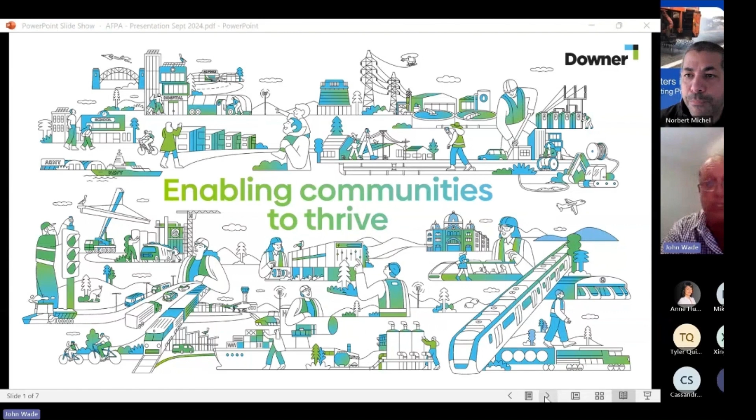Representing Downer today on this presentation, one of the key things for Downer is sustainability. It's one of the key pillars for Downer's purpose, and part of that is delivering low carbon, sustainable pavement solutions to roads, airfields, and mining and the private sector.

Just some high level numbers to run through as we get through the rest of it. At the moment in Australia, Downer's spraying over 35 million litres per annum without any cutter. So it's pretty widespread already, and there's lots of other solutions we'll cover off today about adding to that along the way.

Part of what we're going to talk about is crumb rubber in the first part of the discussion, and that's probably around the production of crumb rubber and essentially a lot of the new field blending techniques that have evolved over the last 4 or 5 years, in support with TSA and other partners.

Tyre recycling, end of life tyres, is a big part of ensuring sustainability. At the moment we're doing nearly 375,000 tyre end of life equivalent passenger unit tyres.

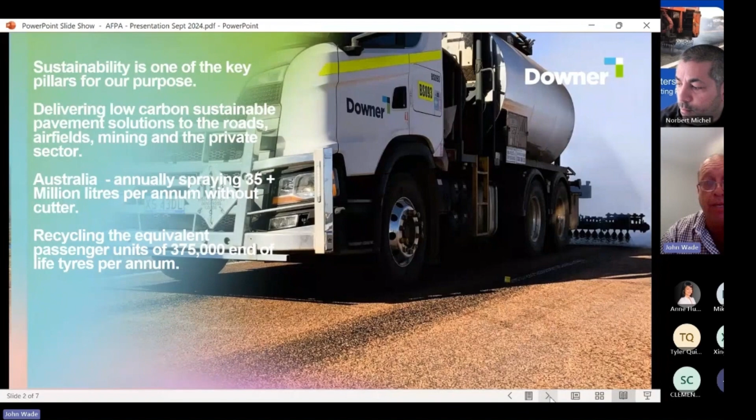For the rest of the presentation, we'll talk about field blending and crumb rubber in the field, and towards the end, other solutions that are available probably at scale already that some people may not know, and the combination of some of those treatments. So the first one we're going to talk about is production in the field.

Crumb rubber production - for most people, this is known as plant blended. It's really normally from a fixed plant, normally a large fixed plant in a metropolitan area, normally with both low shear and high shear technology for blending crumb rubber.

Nothing wrong with fixed plant blended crumb rubber, any of those things. I think the opportunities are it's large scale, can be modified, large storing, high production capability, and probably a lot of control where you've got a large manufacturing process with all of those quality controls you can put in place in a large fixed facility.

I think the other one is some of the projects it's ideal for. It's really ideally suited for something that's within a suitable or specified haulage radius, and that varies around the country, but it's certainly ideal for those environments.

I think one of the challenges that's come with crumb rubber manufacturing, especially in remote places, has been - most of our road network is sealed across the country, especially in rural areas, and carting at long distances. There's obviously been challenges with the product basically settling into the tankers, into the lower part of the tankers, and that's normally where the heating's done.

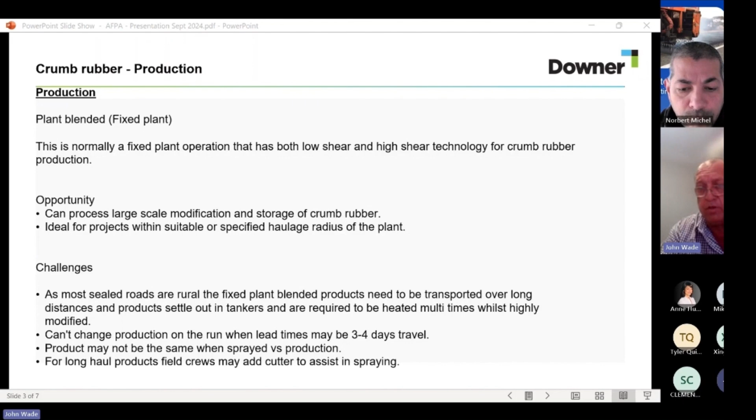Moving on to field blended crumb rubber - there's a few photos after this to run through on what it looks like. Downer has introduced high and low shear technology and some purpose-built handling equipment to produce high quality crumb in the field, and that's really taken off in the last 5 years.

Big acknowledgement to TSA for a lot of support and helping bring some of that technology to the field to get more end of life tyres recycled.

I think the new technology now, and it's in the market, is it's bringing that fixed production technology to the field - for the mixing, shearing, digestion, storage, and obviously testing in the field to make sure you're getting the highest quality product you can in the field.

Obviously, some of the advantages are products can be manufactured with limited storage times because you're making it on the run. It obviously can be modified on the run.

It's out there, and you don't have some of those long storage heating costs that come with wasted energy, or loads that have turned up on site that you don't know what to do with because it's either rained or there's been a breakdown or some unforeseen circumstance that's happened on a project.

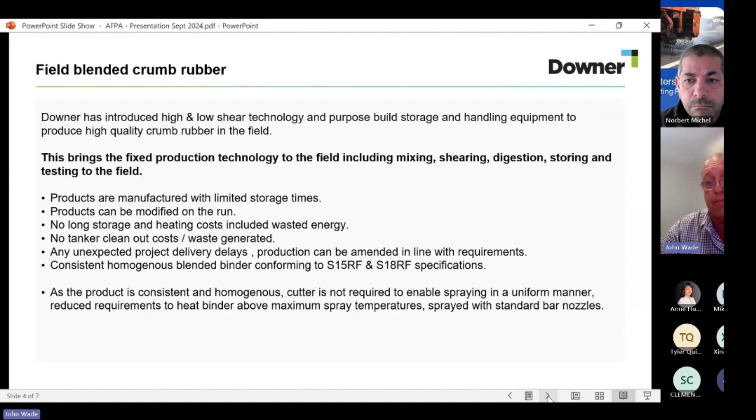Just to share a photo - this is from a project in WA in the Goldfields region. I've just completed a project there over the last two seasons, and travelled across and did a lot of work in South Australia too. So it's one of the units that's floating around - this is one of the larger ones.

These units run PLC control for flow control and temperature control, and have all the other safety features you would get in a fixed plant, with alarms and the like. The other unique thing is everything's done under suction, so there's no binder under pressure when it's being manufactured - anything going from one location to another is all under suction.

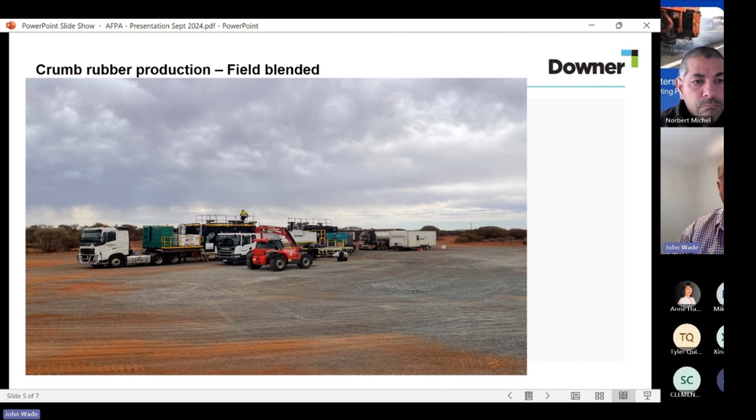Let me share the next slide - it's an aerial view of a roadside setup, a smaller version. The vehicle on the left is the raw road tanker turning up with straight run bitumen. From there, it's transferred into this vehicle here, which is basically mixing and digesting the raw crumb rubber with the bitumen.

It's then transferred into the high shear mill in this facility, passing through in a single pass through the shear mill, and then going into a purpose-built digestion tank that's got all the controls on it for maintaining the product in a stable format. Once the product's released and passed, a test is taken from there, and it's then released and put into road tankers to travel to site.

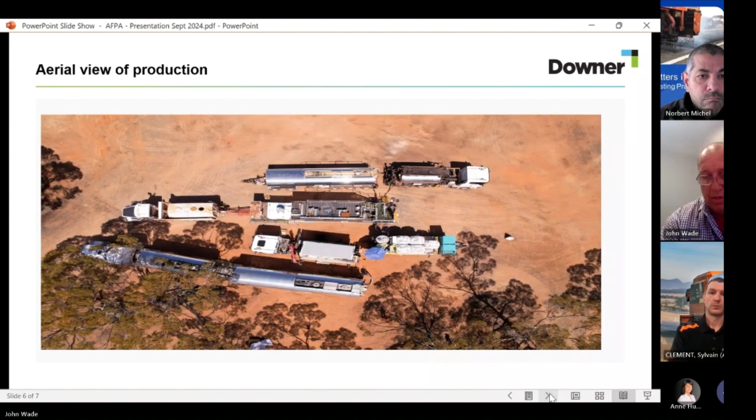So it's an aerial view of a very mobile facility that can be moved around, and as I mentioned, that unit travels around along with the others.

I'll just touch base to finish off with some of the other items that are available at scale across the country and are widely used. I still think there's opportunities for improvement in all of these items, but sometimes a combination of them is probably where we'll get some of the bigger benefits along the way.

As Norbert mentioned, the next session's about emulsions and the development of those. At the moment there's widespread emulsion primes available, there's obviously high binder PME emulsions available, and pre-coats that are all emulsion based and widely used across the regions. There's also micro surfacing, and I'll touch on a few examples of what that can be done in combination with other treatments.

One pass combination spreaders have been around for a while, but in the past have probably been used more in maintenance activities. The benefits of using those have now moved into the conventional spray seal market, and we're using a lot of them across multiple regions now - there's lots of safety benefits, and some improvement benefits around stone retention early on. So that's another solution that's in place.

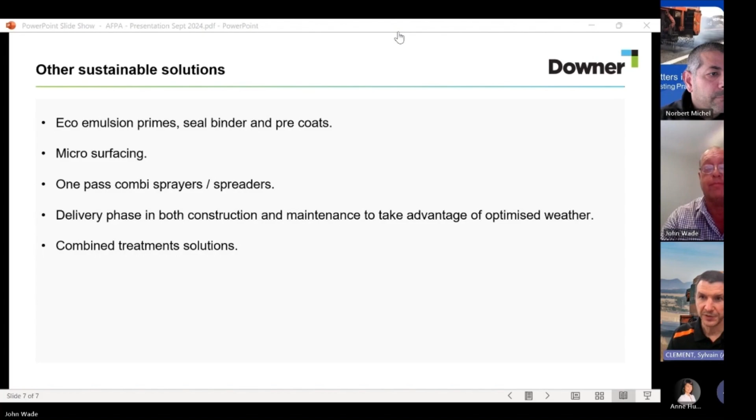No worries, thank you John. I'm going to share my screen. That should have come through. Let me know if you can see and hear me. All good, all good, no worries.

Thanks John, thanks AfPA and Norbert for giving me the opportunity to present today. My name is Sylvain Clément. I work for VSA Road, which groups Primal Surfacing and Inroads, a spray sealing entity operating mainly in Victoria, South Australia and New South Wales.

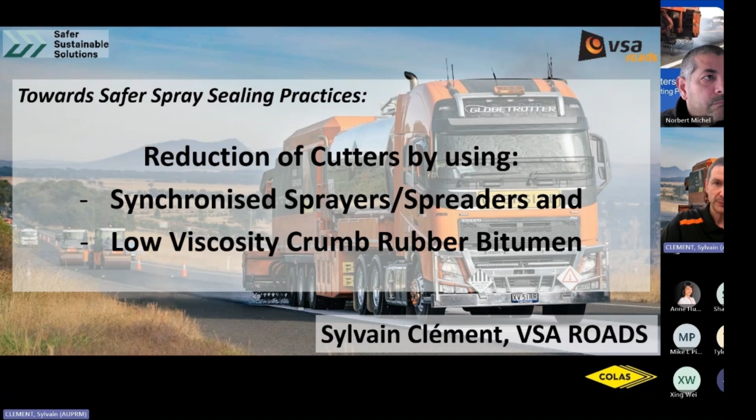Today I'm going to present on reduction of cutters, our strategy using combination sprayers and spreaders, as well as a low viscosity crumb rubber bitumen. First, background and challenges of reducing the amount of cutter we're using. Just some context: I'm talking from a southern states point of view. In Victoria, we tend to use more cutter as a percentage than the rest of Australia, so keep that in mind as I go through the slides.

I'm going to introduce the solution we've put together, then give you three concrete job sites we've completed in past years, before giving you some stats and conclusions on where we're at with our project. To start, we already touched on why we use cutter and what the associated risks are during the first webinar.

I'll be quick showing the first major hazards in terms of using cutter. On the right-hand side here is a video of what happens when things go wrong. A cutback bitumen is a mixture of a solvent with a flash point of 70 degrees, introduced into bitumen handled at 200 degrees, way above the flash point of the mixture. As soon as there's an ignition source, vapors can and will ignite, as you can see in this video. It's worth noting that even without cutter, hot bitumen can itself ignite at extremely high temperatures, but the more cutter in the binder, the more likely the ignition.

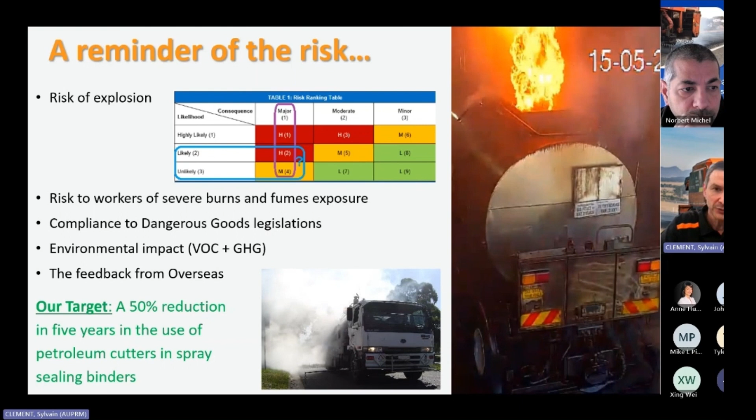So in a way, Australia is a bit behind the rest of the developed world in that regard. What we've done at Colas and VSA is set ourselves an internal target to reduce the amount of cutter we use in our spray sealing over a period of 5 years. So how are we going to do that, and how have we been doing it? Here's a bit of a recap of why we use cutter.

It's to reduce the viscosity of the bitumen so that it sprays and fans properly through the spray bar, and once it's on the ground, the aggregate needs to be able to stick to it. Typically we do that with cutback bitumen, but instead of adding cutter to reduce viscosity, we can simply emulsify the bitumen and use bitumen emulsion, which is widely used but comes with its own limitations. That's not the topic of today's presentation, so I'll skip it to talk about the direction we've chosen to go.

Which is using a low viscosity hot crumb rubber bitumen. Five years ago, we approached our bitumen supplier, Sami Bitumen Technologies, and they did a whole lot of R&D in the lab to come up with a low viscosity formula that still meets all the S45R specifications — torsional recovery, softening point, all of that is exactly the same. It just behaves differently in the spray bar.

So we're using that product, but spraying it is only half of the jigsaw puzzle — you also need to get the aggregate to stick to it. On the right-hand side you can see measurements we've done of the binder temperature as soon as it's sprayed on the pavement. What we noticed, and were very surprised by at the time, is that within half a minute the binder reaches the pavement temperature, which in Victoria — it might not be as bad in Northern Australia — is typically below the softening point of the binder, meaning the binder isn't able to wet the aggregate as much as we want.

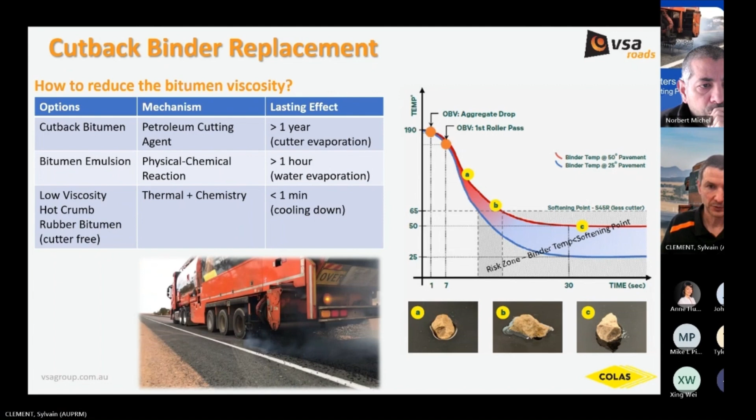Next. It's bugging. Oh, what is happening? Oh, thank you, Microsoft. Sorry, just a sec, I'm going to restart it. All right, can you still see the screen? Yep, all right good, sorry about that.

So the next step for us — because at the same time as we're trying to reduce the amount of cutter we use in our bitumen, our Victorian State Road Authority put a challenge to the industry to stop the practice of reverse spreading aggregates in spray sealing operations. So we had a 5-year transition period in which we had to come up with a new way to do so.

So we decided to have a bit of a holistic approach, looking at our spray sealing crews. What you can see on the screen is a typical spray sealing crew, and we've highlighted all the hazards and potential issues around our current practice.

On the top left of the screen, you can see a tipper reversing with a hoist up in the air, which can be an issue if you come close to power lines or even trees along the roadside. This tipper is reversing at moderate speed, and you can see an operator on foot walking near it, which is not ideal.

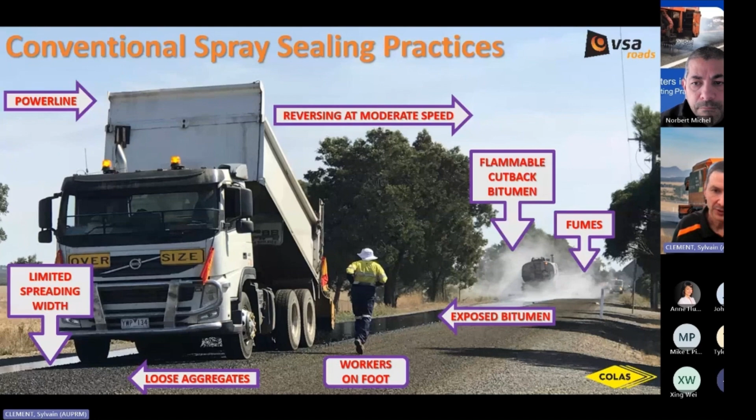This is a solution we came up with. This equipment is called an OB Vario. It's a combination spraying and spreading unit, which holds hot crumb rubber bitumen, in which we haven't put any cutter, some aggregates, a conveyor at the back to be able to self-load on the job sites, and a telescopic spray bar and aggregate spreader box.

Going around the photo again, we can see that most of the hazards previously identified have been reduced, if not eliminated. We don't have any more hoist. We're going in a forward-moving direction at a slow speed. There's not as many people around the equipment that needs to be there, so you decrease the risk of interaction.

Exposed bitumen is no longer there. There's just a small strip between the spray bar and the aggregate spreading bar of bitumen exposed, but otherwise we cover as wide as we spray. The bitumen, as I just mentioned, is non-flammable, which results in much less fuming coming through the sprayer.

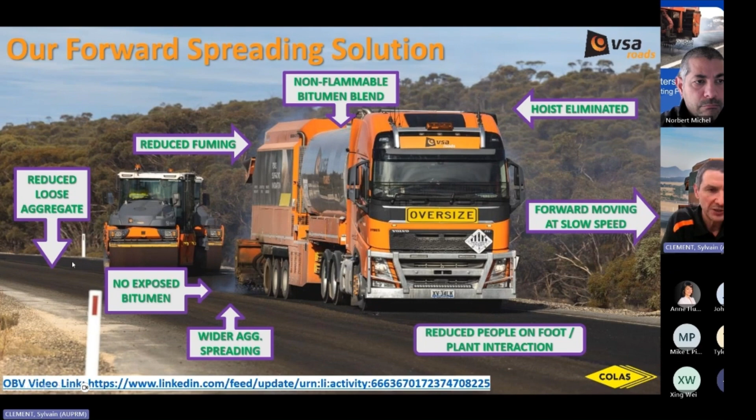We have also noticed that because we're spreading in a forward direction, there's about a 25% reduction in aggregate spread rates, meaning our brooms at the end of the job are removing much less loose aggregate, and we're wasting much less.

Now I'm going to show you 3 examples of jobs we've done in the past with those machines. The first one was back in 2021, our first high-profile job on the very high traffic volume freeway, the Western Freeway, just outside of Beaufort.

We had to do the slow lane where there's a lot of heavy vehicle traffic typically on it. So it was very important for us to be able to complete that job without using any cutter, because that way the softening point wouldn't be affected over time, and the risk of flushing would be really minimal.

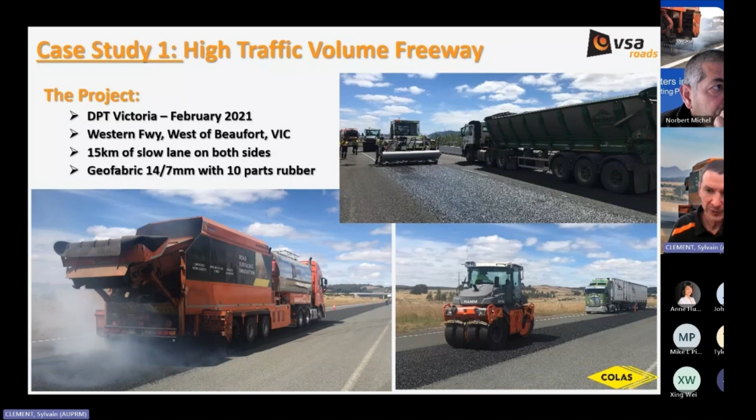So we've used our OB Varios to do Geofabric 14/7, 10 parts rubber, no cutter, and a few action shots there. I took this photo last month, so just look only at the slow lane, with a great texture and overall aggregate retention.

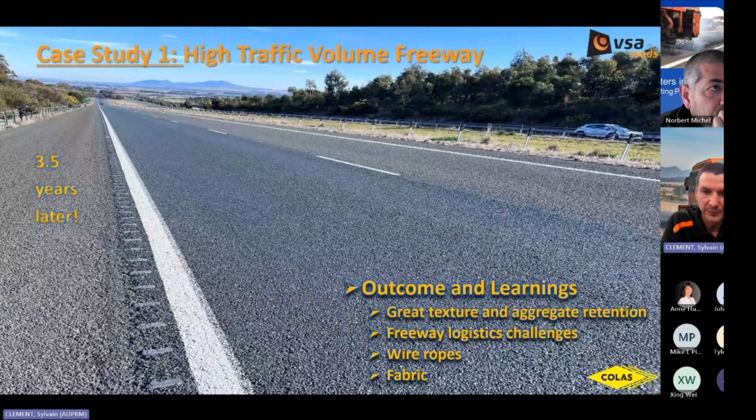Another type of job, completely different now, with very low traffic counts, outback Australia at the border of New South Wales and Queensland in a small town called Tibooburra.

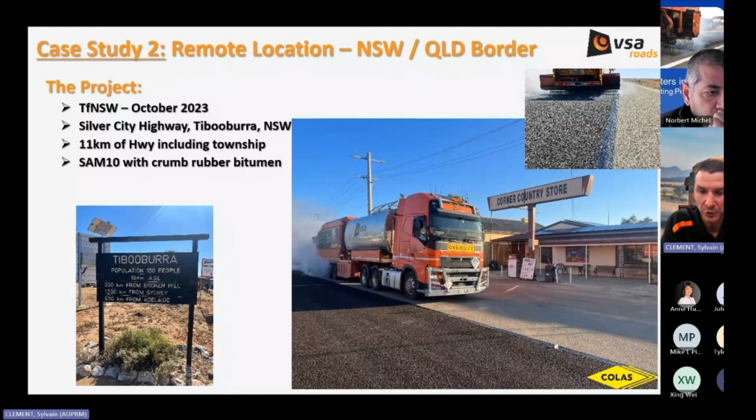We did this at the start of last sealing season for Transport for New South Wales. It was a single coat, SAM 10 with crumb rubber again, and without any cutter.

On this job, the aggregate had to come from nearly 1,000 kilometers away. So I mentioned 25% saving earlier — you can see how, in terms of cost saving and carbon emission, there are savings as well.

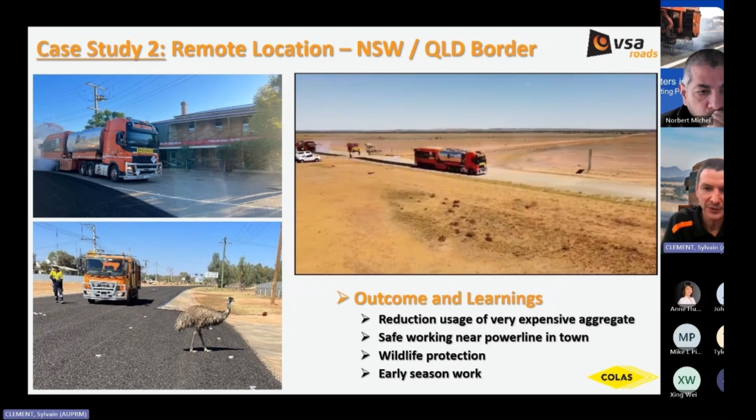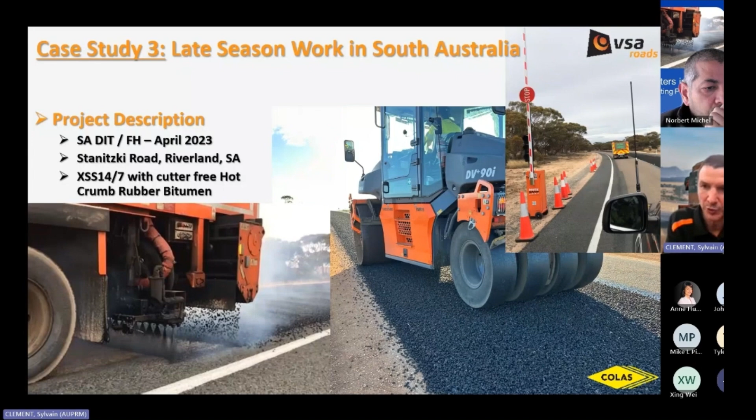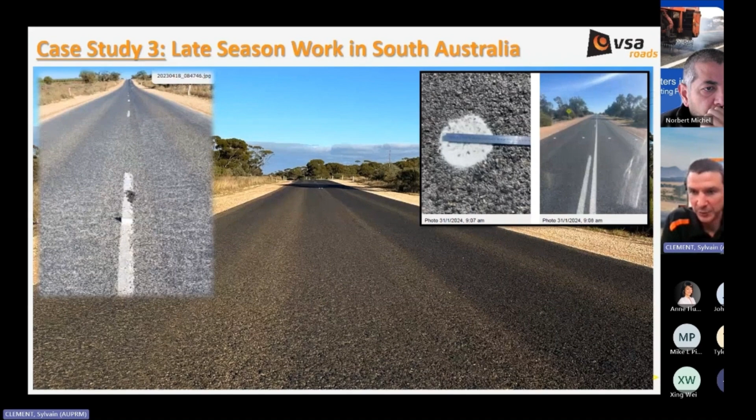A photo on the left-hand side shows this job site before, during, and after on the right-hand side. We've done some sand patch tests at the start of the season, and everything come up in specs. Very happy with the results.

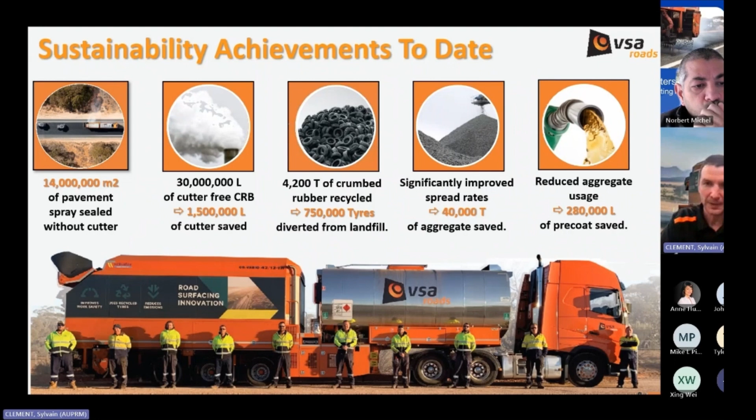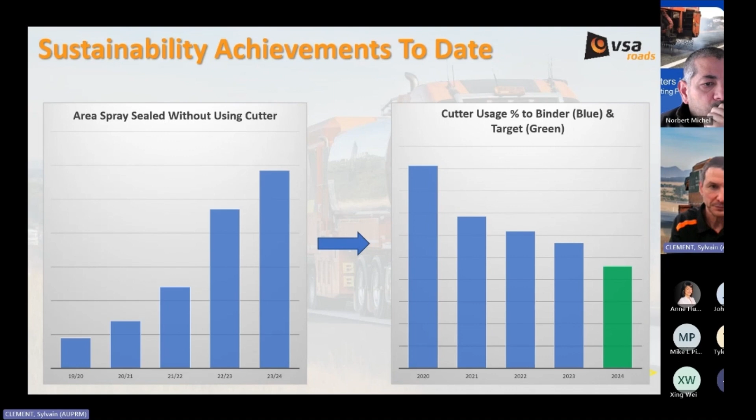So in conclusion, thanks to our combination sprayers, we've been able to eliminate the use of cutter while still spraying hot crumb rubber bitumen, thanks to SAMI low viscosity S15R. What we haven't done is compromise the performance of our spray seals.

Even though we're not using any cutter, obviously we were very nervous at the beginning, because in Victoria, when you do spray seals, you can use 4-6 parts of cutter in your spray seal, and when you go from that to 0, you're nervous. But in the 5 years of using this equipment, we haven't had any rework to worry about.

The productivity also, we never tried to achieve any more than a spray sealing crew. We were just trying to replicate, and we are able to do that. So that means the square meter rates doesn't need to go up as a result. Overall, safer and more sustainable outcome.